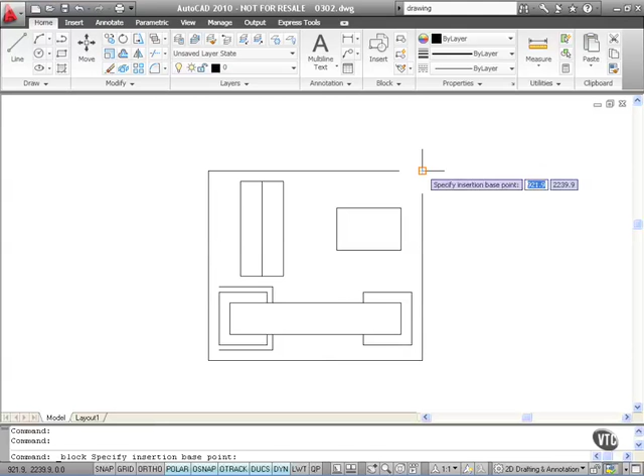I click on pick point, and I'm going to use this top corner here, this one here, specify insertion point. I hover over the endpoint snap with the object snap there and left click. As you can see, it now has X and Y coordinates for that base point. Now those X and Y coordinates are not fixed. What we've done there is select the corner of the phone to insert it into the drawing or any other drawing.

I now need to select the objects that are going to make up the phone here in the objects part of the dialog box. I'm going to convert the existing object into a block anyway once I've selected the objects. Notice no objects selected right now. I click on the Select Objects button here. It takes me into the drawing.

I'm going to do a quick crossing selection window, so two left clicks like so, and it selects all of the objects. And I'm just going to press Enter there to confirm those objects, and as you can see in the dialog box now, I get a little preview just there, and it tells me I've got 31 objects selected.

Annotative behavior we're going to ignore. We cover that in the Basic 2D Concepts course. Scale uniformly though is useful. That scales uniformly in the X and Y direction when you use the scale command on a block. And always with blocks, allow exploding. You can explode the block back to its original objects using the explode command.

You might want to do that to explode this block, make some slight changes, and save it as a different block. Perhaps it might be a slightly different handset, for example. The block unit is millimeters, it's a metric drawing in this case, and open in the block editor. I'm going to tick that box there because I want to show you the block editor for dynamic block editing. I click on OK now,

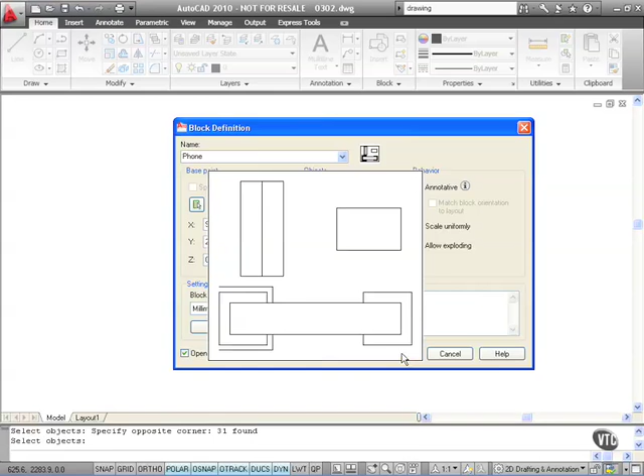and the screen changes and I go into a different area, so to speak. I'm not actually in the drawing anymore. I'm actually in, as you can see from the tab at the top there, the block editor.

You'll notice these are color coded. You get a sort of olive color for the block editor now, so you know where you are. They're all color coded now, which makes life so much easier. And what you've got here is your block authoring palette.

Now this particular block, I'm going to apply a flip action. Before I apply a flip action though, I have to apply the flip parameter. So I go to the parameters tab here, click on it, and as you can see there are various options available, and there's my flip parameter option there.

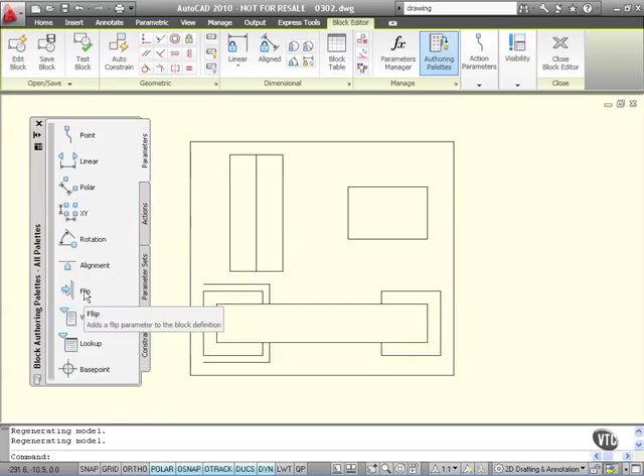I click on it on the palette, come into the drawing area, and it asks me to specify the base point of the reflection line. A flip is like a mirror command. So I go from there, left click, to there, left click. That is where I'm going to flip along that edge of the phone.

Now you'll see I've got a label there. I'm just going to place that to the right there. It doesn't matter where it goes because you'll only ever see it in the block editor, you won't see it on the drawing. We get two little icons appear - there's our flip icon, and we get a little exclamation mark.

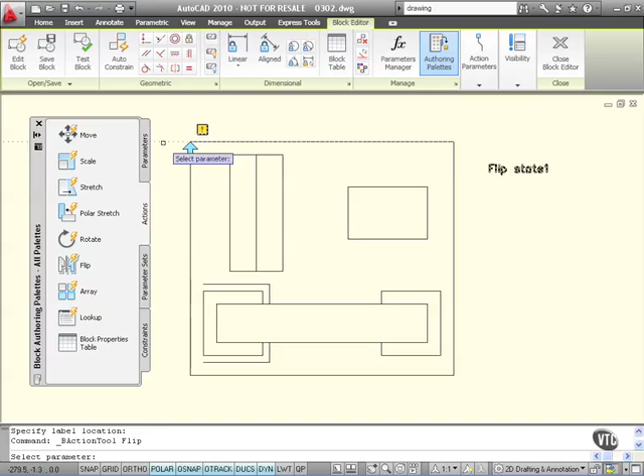Now the reason we've got that is we haven't selected the objects that are going to perform the flip action. So we go to the Actions tab now, select the flip action here, come into the drawing area again, and it asks you to select the parameter. Now I can select the line, I can select the exclamation mark, or I can click on the text for the flip state - doesn't matter which, all of them are part of the parameter.

So now once I've selected it, it goes select objects. We need to select everything. So left click down here, crossing window selection, left click again, selects all the objects, press enter to confirm, and you'll see now there's our little flip action.

These have changed now in AutoCAD 2010. You get an icon now instead of text like the flip state. So you get a little icon now telling you you've got a flip action there.

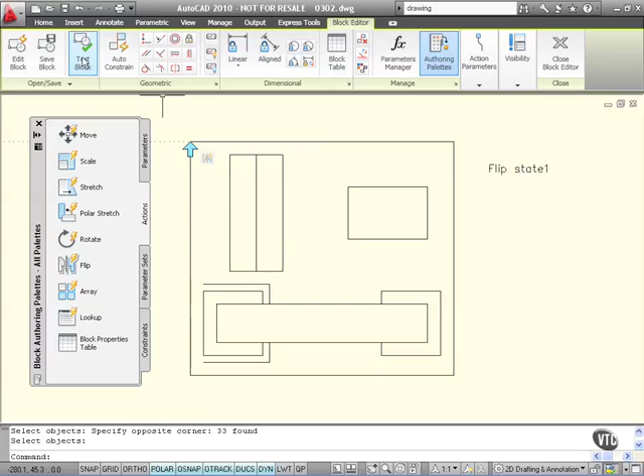Now everything is done. Now what I want to do is save the changes to the block, go back into the drawing and test the block. Wrong - AutoCAD 2010 now has a test block option. So it opens a window to test the block, so I don't even have to test it in the drawing itself. I can test it separate to the drawing.

So I click on test block, takes me into the test block area. If I click here, like so, there's my block, there's my insertion point for my block that I selected earlier, there's my flip action there. Click on the flip action, and as you can see, it works - it flips the phone from left to right, like so.

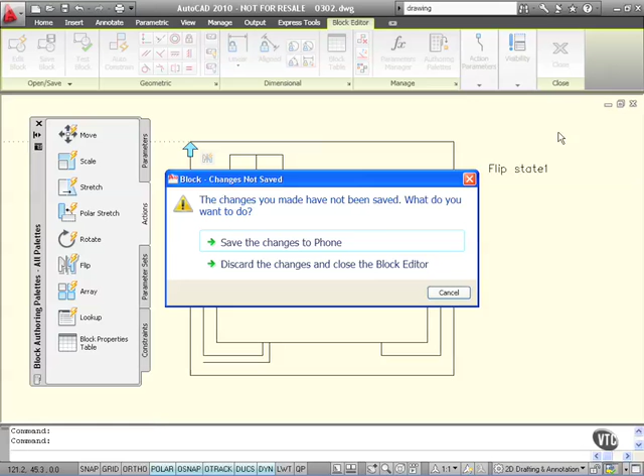So I can now close my test area here, test block window. Takes me back into the block editor. If I click on close again now, it'll prompt me, do I want to save changes to the phone block? Yes, I do. So I save the changes by clicking here, and I'm now back in the drawing. It looks exactly the same.

It's not. Let's just zoom out slightly and pan a little bit. If I click on that block now, there's my flip action, and it works in the drawing as well because I've already tested it. This is a nice little feature as well in AutoCAD.

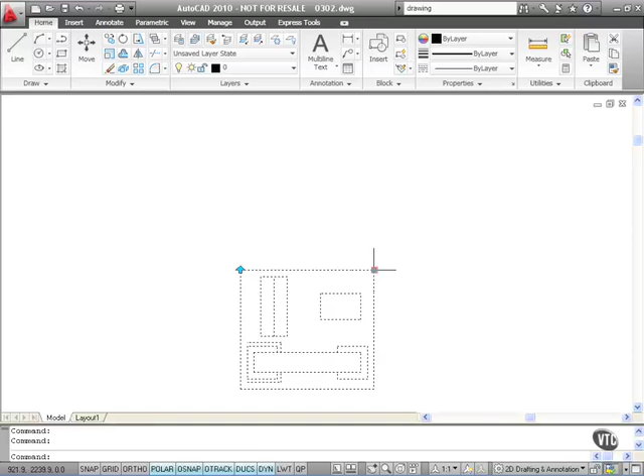If you've got a block and you've given it a base point, it places a grip on that base point, and I can drag the block around. I can place it anywhere I like in my drawing. Isn't that easier than trying to move all those lines around that originally made up that phone?

Content reuse and dynamic blocks - fantastic in AutoCAD 2010.